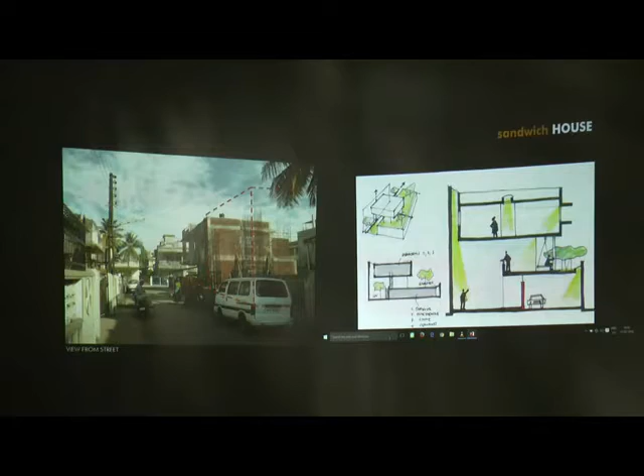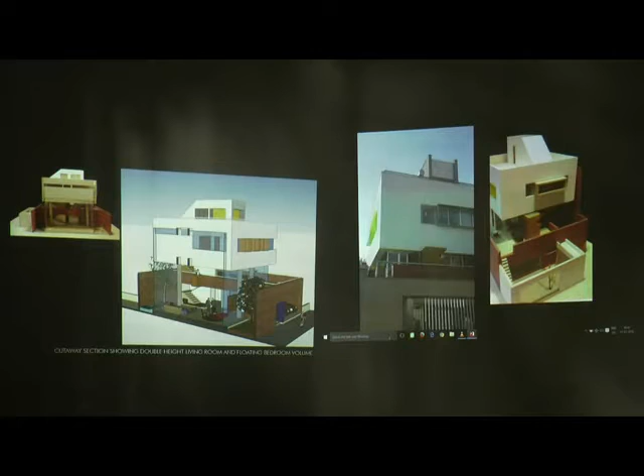Here are comparatives of the model and the real building that was built. The section over here shows the double height living room space and how the upper area overlooks it, and the staircase, which is put in the most common zone to create a sense of forced interactions between family members. Also in terms of the material, the lower one is still using the humble brick, and as you go up it becomes more about the newer materials of acrylic and steel and glass. Next.

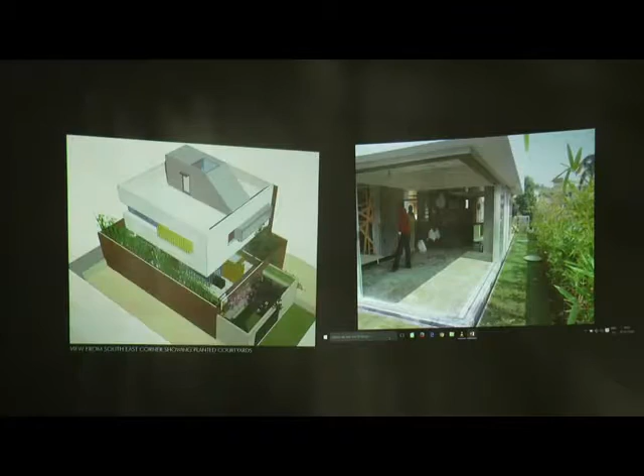The slide on the left shows how their upper object was made to hover and feel heavy onto that space below. And the one on the right shows the whole brick wall that gives way, so that the grandfather's room was right behind it, and how they could have opportunities of interacting with the street that was right outside whenever they imagined them sitting in that open space between the building and the wall.

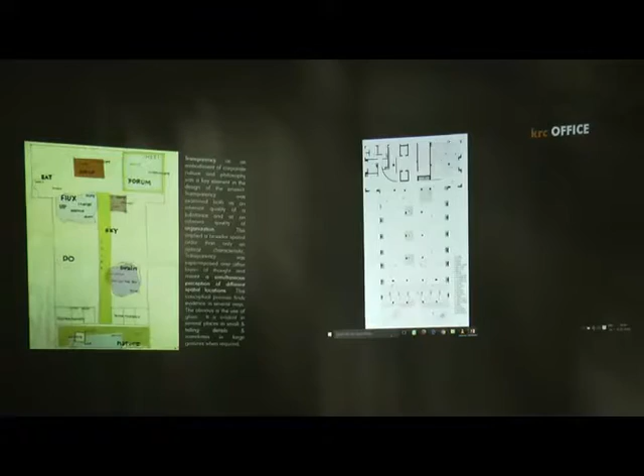We are showing only one interior project today, more from the point of view to explain again the way we work. This is for a stockbroking firm, and when they came to us with their whole requirements, we questioned, and one thing that came across as their belief was that they believed in transparency in the system. And we took that up as one of the main concepts in driving the whole project.

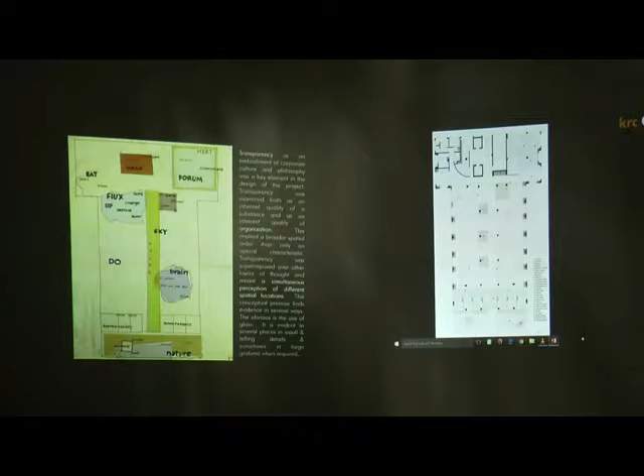They came to us when the slabs were still being cast for the building, and this was on the 5th floor. So we helped them cut a slice of skylight right through the middle, which does wonders today, where you don't need to use lights all the way up to almost 5:30, and typically stockbroking firms don't work post 4. So it really has helped them get down their budgets.

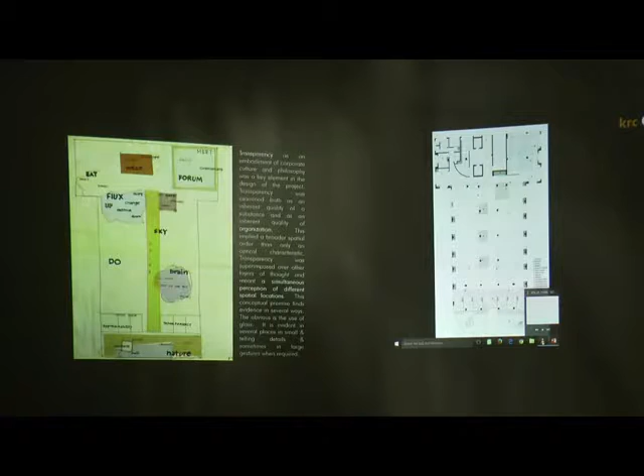There was a terrace right in the front, which was fronted by glass cabins, which held all the managers and directors, a sense of privacy, a sense of transparency, which showed the firm's belief that we don't want to keep anything hidden. So they were all glass cabins, which were also allowing the terrace to be enjoyed by the people within.

The part that you see marked as brain was mainly the research center, and hence was designed in such a way that it was never rigid. It was always capable of expansion and capable of free thoughts coming in and out. The part marked flux is for the real trading that happens over there, which, as you will see in the following film, was designed with glass, with a non-permanence kind of feel to it.

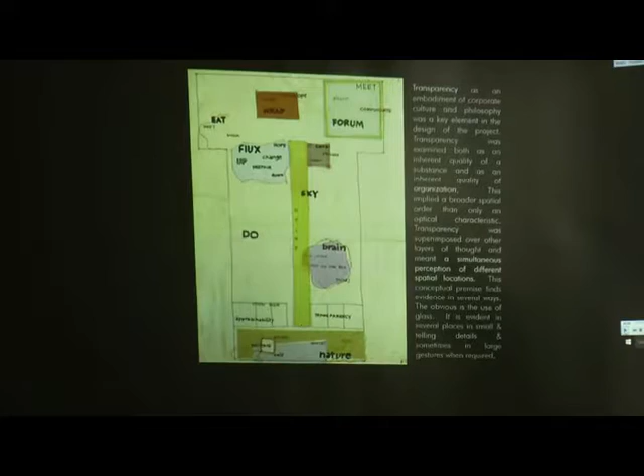And then of course you have the little break area where the eat is, and the wrap. The color of their firm is yellow, orange, and so it was done in this orange wrap, which made a person enter into the whole area. And the forum is a group of 4 conference rooms of different sizes, which get combined into one as and when required.

We will follow this up with a short film on the project, which was taken about 4 years after the project was completed. And we just show it as it is. And then Pinkesh shall go ahead and talk to you all about the recent 2 projects.